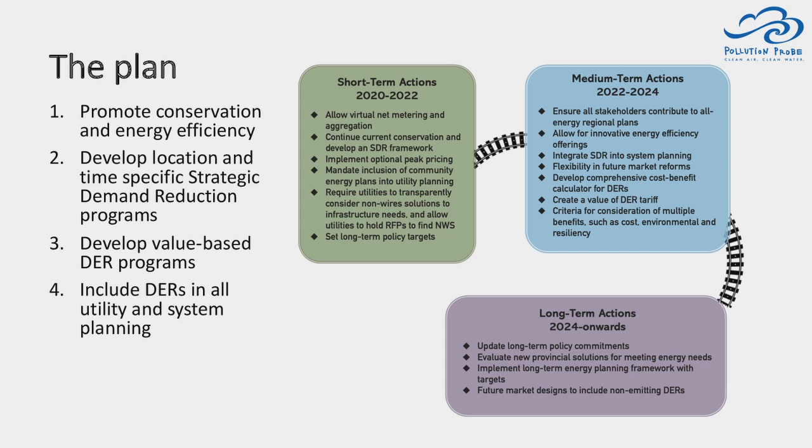As we mentioned, the closure of Pickering can be an opportunity to rethink how we plan and develop electricity in Ontario, and as a case study in how other urban areas can meet rising energy needs, and our recommendations can benefit other jurisdictions. For more information, you can find our report on our website.

We also have a technical appendix which goes into how we created the numbers and how things progressed.

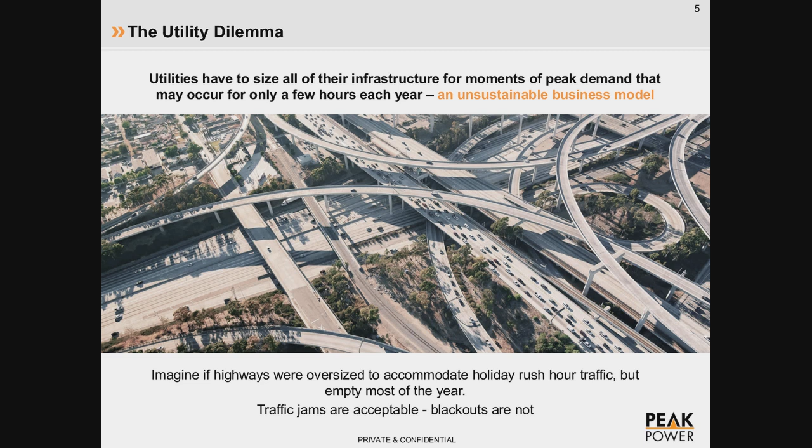Imagine, if you will, if highways were built that way. What if highways were built with 30 lanes to manage Thanksgiving rush hour traffic, but were mainly empty most of the time? Grid infrastructure actually has a utilization factor of less than 20%. So it truly is mainly not used except for a few hours of the year. It's an extremely expensive and unsustainable business model.

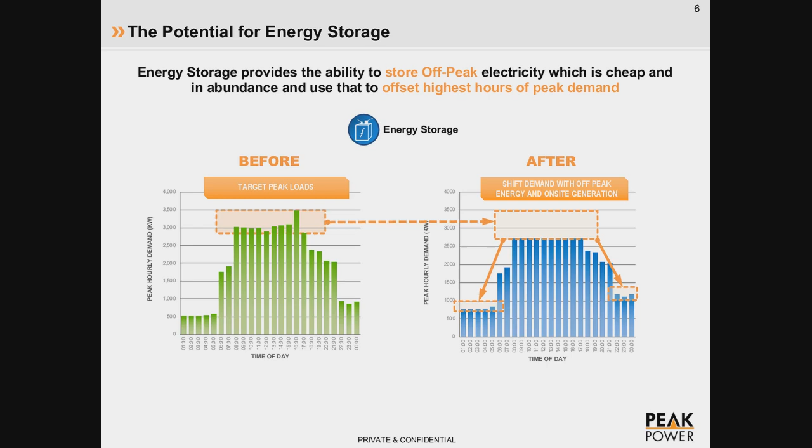Imagine you're the utility or the ISO. Clearly, the situation on the right is much easier to manage. If your job was to make sure that electricity supply was balanced with demand, this image on the right is a much easier scenario to manage because it's more predictable.

The problem with this model is the capital cost and the permitting risks associated with these batteries. The batteries are very expensive and very big.

So when we look to the future, we envision that actually electric vehicles can serve the same purpose. If people are driving their electric vehicles to work, we can turn the capital cost of stationary batteries into an operating cost for mobile batteries and pay the drivers for the service of allowing us to access their batteries. And we've actually done this here in Toronto. We have 20 participants in 2 buildings in downtown Toronto, and we're expanding this to over 100 over the next year or so.

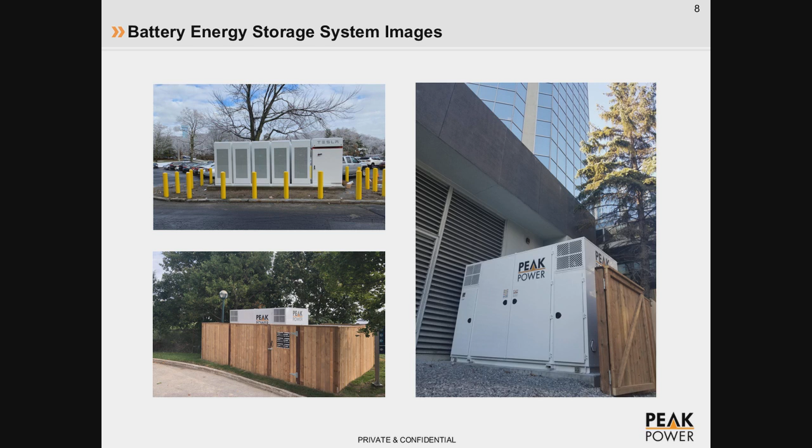Moving along, this is just some images so you can see what the batteries look like. These systems are 500 kilowatt systems, if that means anything to you, and they're saving the clients roughly $60,000 to $70,000 per year at no cost. That's not the gross savings, that's the net savings to the client. That's actually only 25%. The full savings are much greater, but we need to take a share for our own services and for financing, paying off the systems.

Peak Drive is our marquee project. We believe it's going to be one of the largest transactive energy projects in the world, allowing both electric vehicles and buildings with energy storage to provide services based off of real-time market signals. So we got funding from the Canadian federal government. We've already started deploying in buildings in downtown Toronto. The target is to have about 20 to 30 buildings involved. Some of them with batteries, some of them with electric vehicles, all of them being managed by our software.

And the long-term vision is an energy market platform. This is basically this concept of a stock market of energy, where we forecast peak events and send the price signals to optimize the operation of these DERs. So in this example, again, we're turning the centralized model on its head. Typically, we think of energy end users as buyers and utilities as sellers.

In this scenario, imagine that the system operators and utilities are actually the buyers of energy services such as capacity reductions, frequency regulation, demand response events, or deferring infrastructure investments. There are quite a few services that can be provided, and that's only a sampling. The sellers in this case are you and me, building owners, electric vehicle owners, and solar power owners. Anyone with a distributed energy resource can provide services to the utilities and get paid for it, creating new revenue streams for the owners of energy assets.

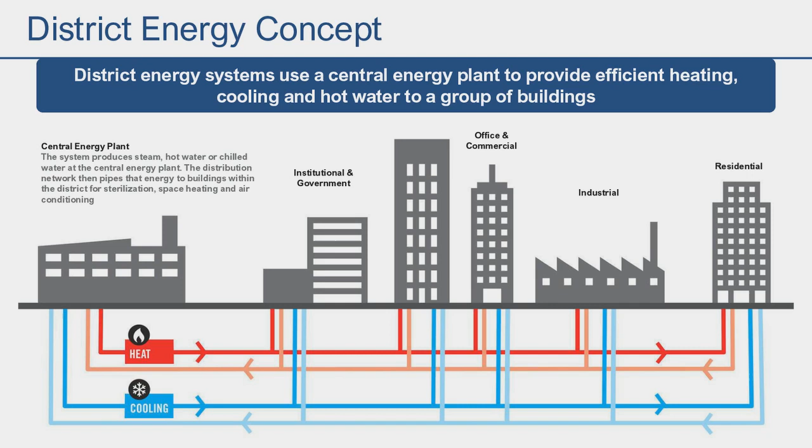And we like to showcase our new projects and talk about our vision and really talk about what we see as possible. And we're not alone in this quest. Actually, the UN itself has a district energy and cities initiative focused solely on the benefits of district systems in dense urban centers. And they focus on the technical, economic, and social opportunities that those systems bring to the community.

So what are some of the benefits of district energy? And how do they fit with where we want to go? And how do the benefits connect district energy to green stimulus and economic benefits, community resilience, and prosperity, sort of like that big package? Well, it's understood that community energy systems harness economies of scale. And that scale really helps to improve energy efficiency, reduce GHG emissions, and lower energy costs.

As well, we can enable fuel switching at scale and enable the integration of renewable energy resources into the networks. These systems that we build relieve strain on the electricity grid, and they can also provide energy storage and demand response capabilities to that same grid. Plus, our systems can help cities avoid building new generation capacity in areas where they're constrained. I think a lot of this is right on point with our other presentations today. Plus, connected technologies can boost system resiliency and reliability, which is all good for city infrastructure and the citizens.

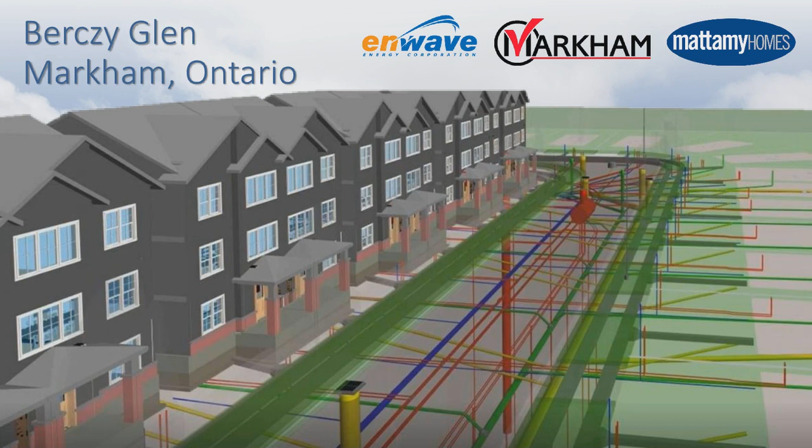So the first project that I wanted to touch on is Berczy Glen in Markham. We are partnering with Mattamy Homes and the City of Markham to pilot a geo-exchange system on a community scale. It's the first of its kind in North America. This project marks a unique collaboration between leaders in single-family home development, sustainable energy, and municipal government.

The development will include more than 300 single-family homes and townhomes, all connected to the community energy system for heating and cooling, as you can see in this diagram with the colorful underground piping system sketched in here.

The key to having this project be transformational is its scalability. Like district energy, this project could be scaled in pockets in different neighborhoods. Scalability both technically and in the replicability of the business model is important. So we're working through many details right now and hope to make some exciting announcements soon.

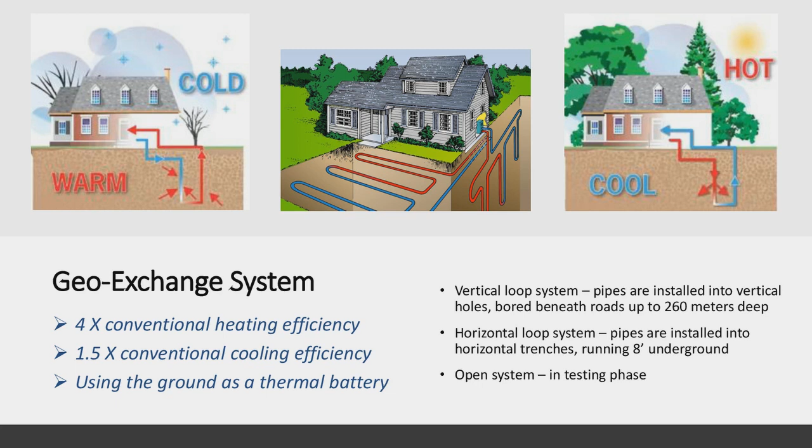Our ability to access the ground beneath the parks, the driveways, and all of the areas of the subdivision is also very unique. Both of these characteristics allow us to reduce costs and increase efficiency throughout the whole system, right from the early design stage. So this is scalability, quite literally scalability past any approach that could be done home by home or building by building.

So for me, this visually illustrates why we work with our partners right from the beginning, and why having a holistic view of energy and communities is so important. We work very closely with the consultants to incorporate the infrastructure into the original community plan alongside, not after, other piping and services are designed in. This makes it easier and much more cost effective for the project as a whole, and it's one of the main reasons we're able to create a business model that works.

So we think that Markham and Berczy Glen is an excellent example of the types of infrastructure projects that could be supported by future government and that could help us manage growth in energy demand in the future.

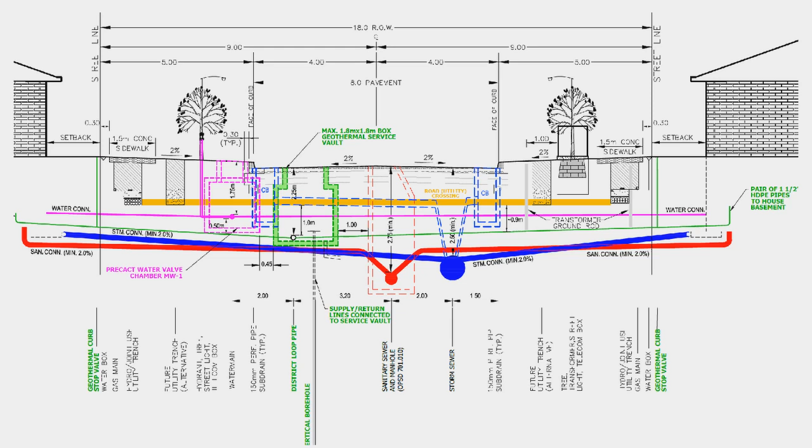The next project that I want to talk about is thermal storage at the Well. If anybody has not heard about the Well, it's a 3.3 million square foot development northwest of Front Street and Spadina Avenue in downtown Toronto. There will be 420,000 square feet of retail and food services, over 1 million square feet of office space, and 1,700 residential units when it's complete.

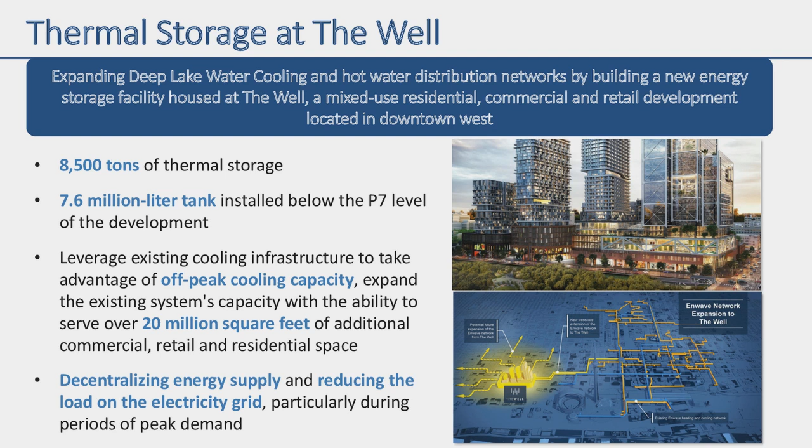And we will be expanding our deep lake water cooling system and our hot water infrastructure to the Well to connect it to the thermal storage tank that we're building there, what we call our thermal battery.

Essentially, the operation is the same in winter and summer. The thermal battery gets charged with hot or cold water at night and disperses that energy into the development during the day when and where it's needed. So we see ourselves as further decentralizing energy supply in the city, reducing the load on the electricity grid by using our off-peak charging capacity—not electricity, but thermal cold and hot capacity.

We think these are some of the largest, most successful goals we've achieved at this site. The thermal storage here will serve as a hub or node in downtown west. It's large enough to serve 20 million square feet of commercial, retail, and residential space, over and above what we already serve.

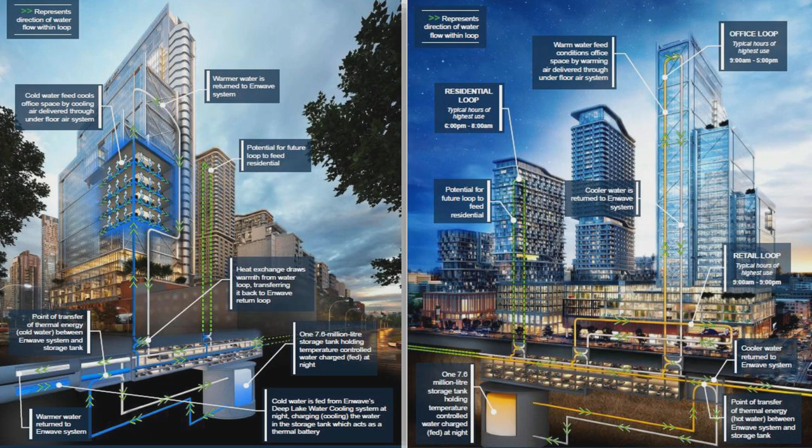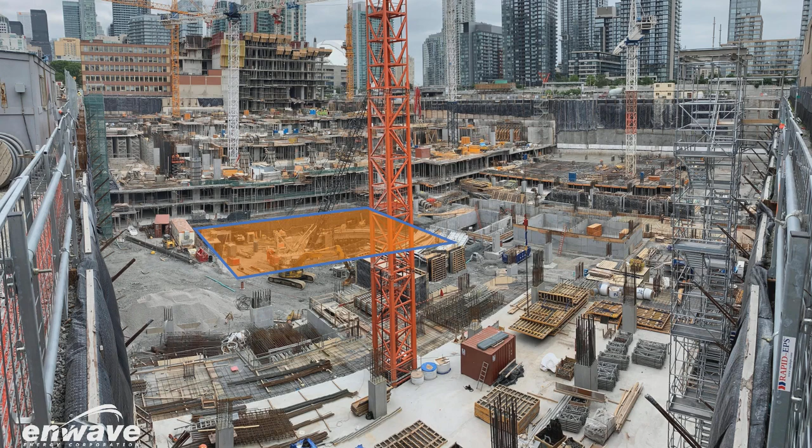We're really proud of this development. I'd like to show a few photos from last summer when we were building and digging out the thermal storage tank area. As you can see, the development is quite early on—they've made it down to P7 level from the ground level. In the orange square, that's where our thermal storage tank is being dug.

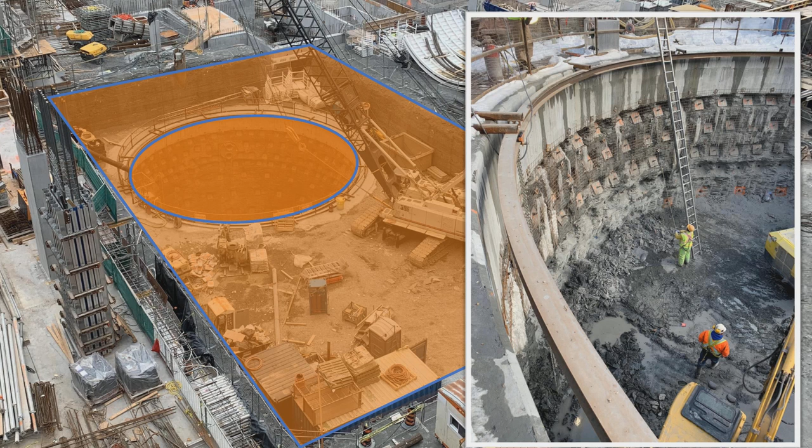Here's another picture, almost on top, where you can see the thermal storage area. The actual tank is the circular area—50 feet across and 150 feet deep. On the right-hand side is a picture of our workers inside. Right at the beginning they hadn't made it too far down, but you can see the size and scale of the tank itself.

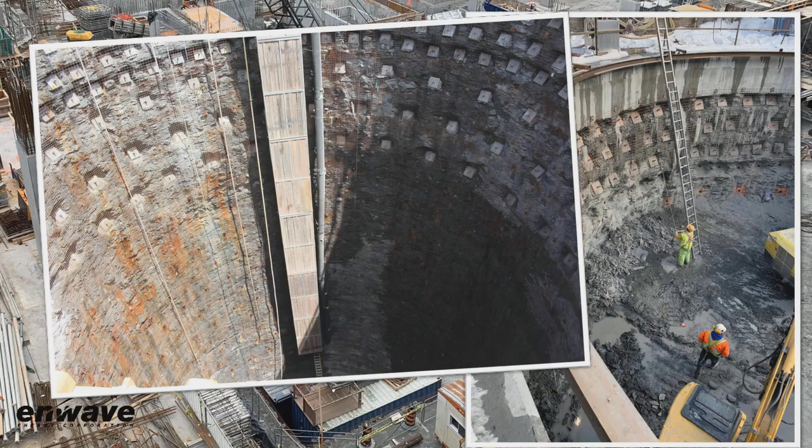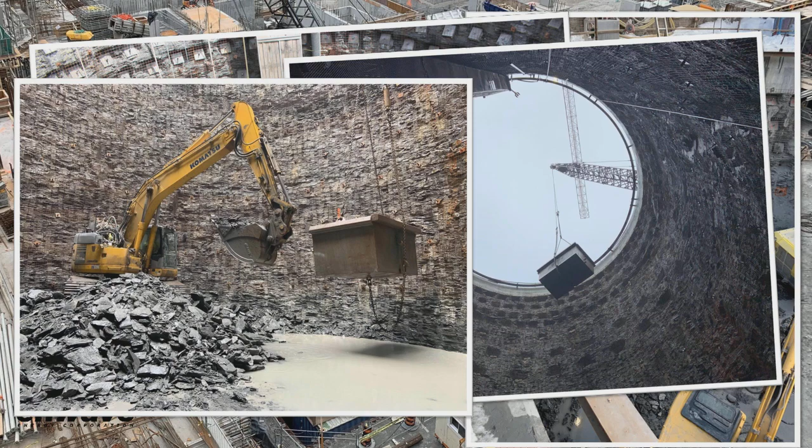Here are a few photos looking down into the shaft. As the summer went on, we made more progress. From the bottom looking up, it does look a bit like a prison. At the bottom we have a full excavator that stayed there, excavating the shale and bedrock as the project moved forward. The final picture is looking straight down into the bottom, and we're pretty excited about this project.

I like to show these photos because now this tank has been entirely covered over, and the buildings are being built on top of it, so we don't get a chance to go down and look at it anymore. But we're excited to see its performance and the impact it makes for the community.

I think we have a tipping point or pivot point where we should be focusing on the economy, on government and companies coming together, driving innovation in the energy sector, investing in new infrastructure or retrofitting existing infrastructure, reducing emissions, improving the health of Canadians, and supporting a strong economic recovery.